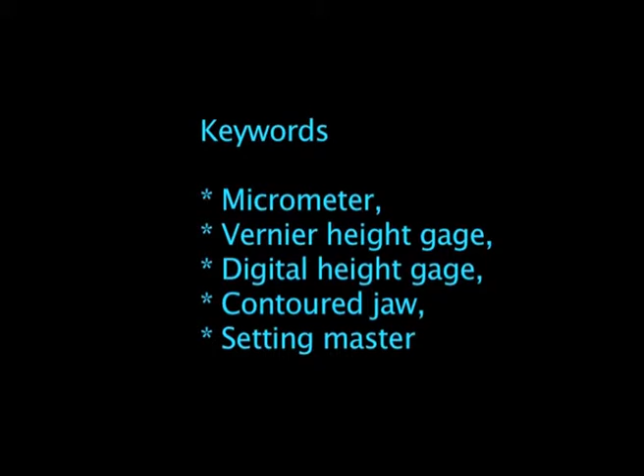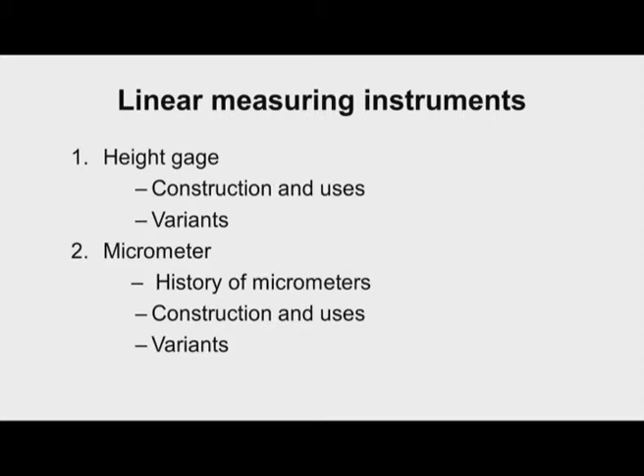In this session we will study about height gauge and micrometer: the construction of height gauge and various applications of height gauge, and the different types of height gauge. Similarly, for the micrometer we will study a little bit about its history, then move to its construction and various uses, and then study the variants of micrometer.

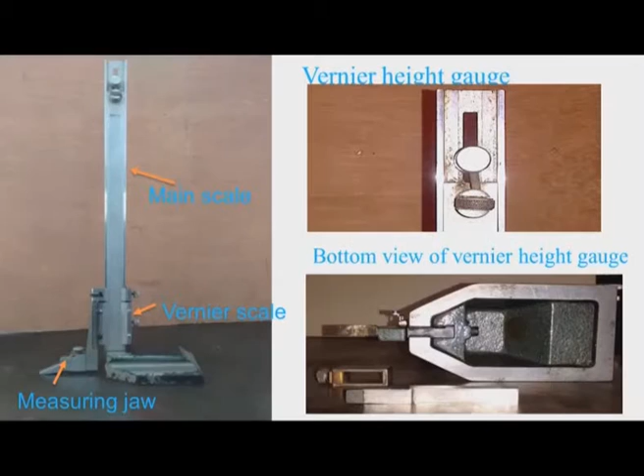Now, let us start our discussion with height gauge. This photograph shows a vernier type height gauge. I will explain the different parts of the vernier height gauge.

This is the main scale, this is the column of the vernier height gauge, and on the column we have the main scale. One side we have the metric scale, and on the other side we have the English scale.

Now, you can see here we have some arrangement for lifting the scale, for sliding it up and down. The details of this portion are shown in this figure. We can see the screw and the nut. By rotating the nut, the main scale can be moved up and down. This is needed for making the zero adjustment.

Coming to the vernier part, we have metric vernier on one side and English vernier on the other. We have a screw for clamping the measuring head to the beam, and similarly a screw for moving the measuring jaw up and down.

I can see here the carbide tipped scriber is fixed to the measuring jaw, and there is a clamp for fixing the carbide tipped jaw to the measuring jaw. By rotating this screw we can clamp the scriber to the measuring jaw.

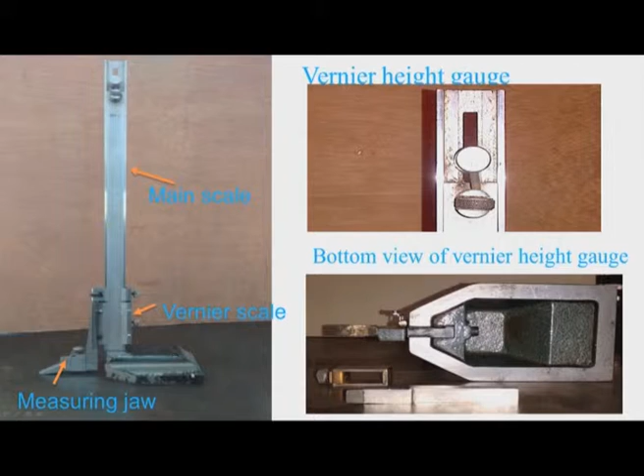This is the base of the vernier height gauge, and here is the bottom view of the vernier height gauge. This is the ground finished surface. At the center it is relieved, and this portion is the bottom of the beam, fixed to the base by means of a screw.

Here you can see the clamp which is used to fix the scriber. This is the carbide tipped scriber, and it can be fixed to the measuring jaw with the help of this clamp.

Now we can see the close view of the vernier height gauge: the vernier and a screw for fixing the measuring jaw to the beam, and then another screw. Initially we have to screw this, and then operate this screw for finer adjustment of the vernier. The scriber and clamp have been removed, and now we are viewing the top surface of the measuring jaw.

It is very essential that the top surface and bottom surface of the measuring jaw should be parallel, and these two surfaces should be parallel to the datum surface within 10 microns.

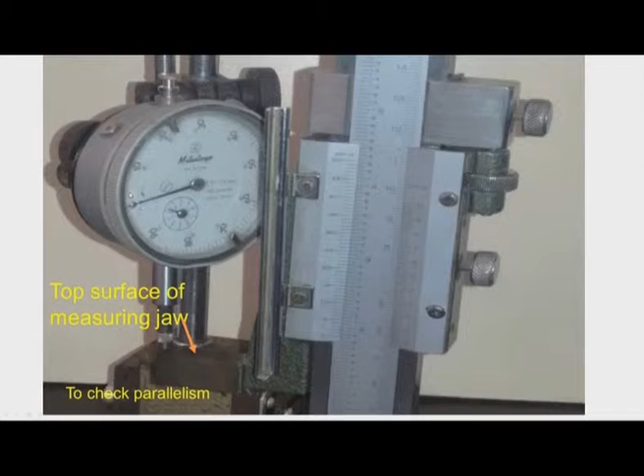Now we have to make zero adjustment when it just touches the top surface of the measuring jaw. Slowly we move the dial indicator towards the beam of the vernier height gauge, and then note down the reading. This reading should be less than 10 microns.

Now, checking for zero error in the vernier height gauge. We observe the main scale zero line here and the zero line of the vernier. They are not coinciding, even though the scriber is in contact with the datum surface, the scale is showing some reading. So this we should adjust by lifting the main scale, as I have already discussed.

Now we can see here we have lifted and made some adjustments in the height of the main scale, and now there is no zero error.

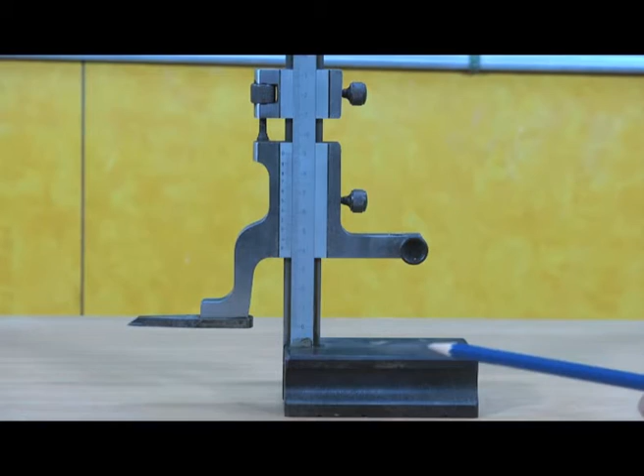Now let me explain the vernier height gauge. This shows the vernier height gauge. This is the base, and this is the main scale vertical bar. You can see the main scale; the resolution of this main scale is 1 millimeter.

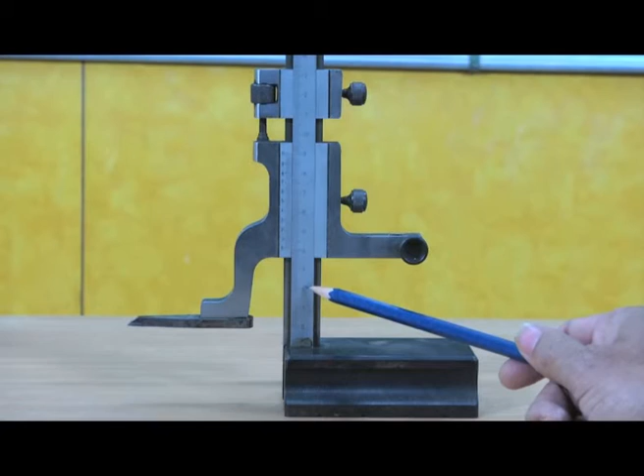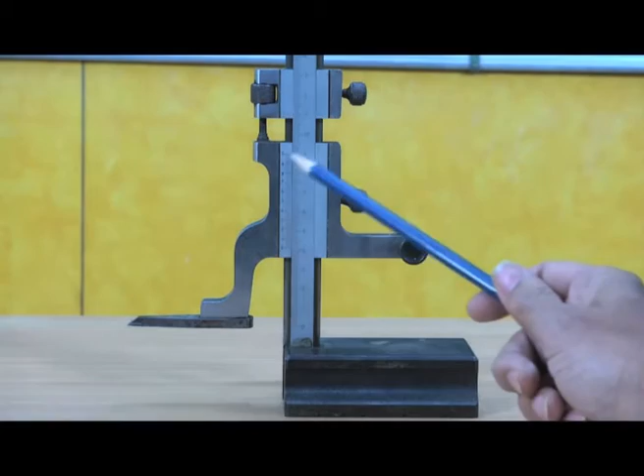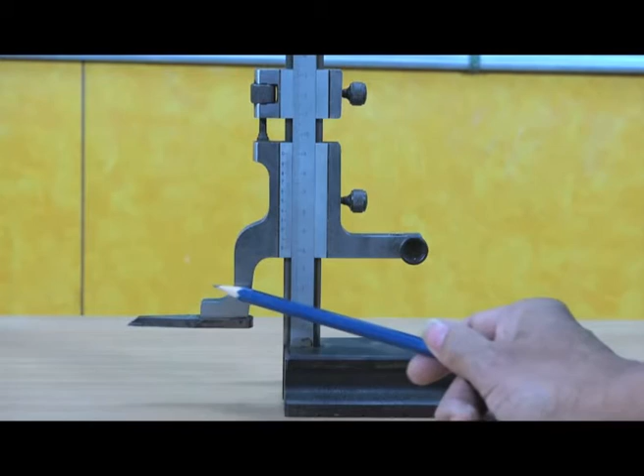Now we can see the range of this instrument is 0 to 300 millimeter, and this portion is the measuring head with the vernier scale. This is the scriber attached to the measuring head, and you can see the carbide tip here. This can be used for scribing lines on workpieces, and also for measuring the height of workpieces.

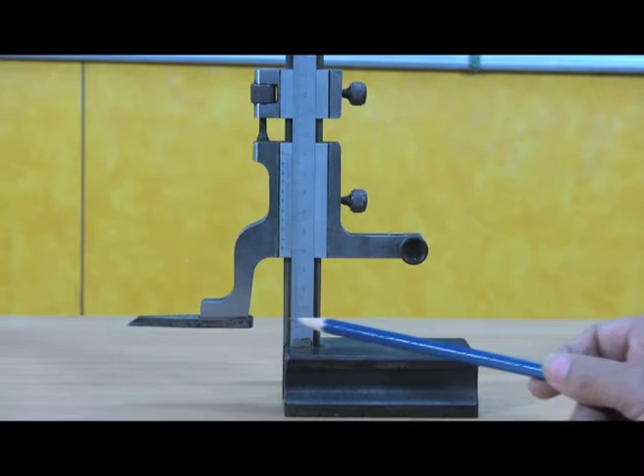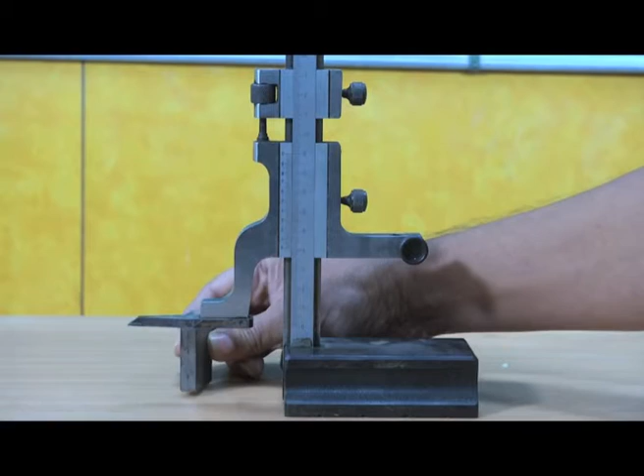Now I will explain how to use this for measurement of height of a workpiece. I am taking a workpiece here, and we should initially check approximately what is the height of the workpiece using a steel rule. Then we have to adjust the gap between the datum and the bottom surface of the scriber, lock the measuring head using this screw, and then use this finer adjustment screw.

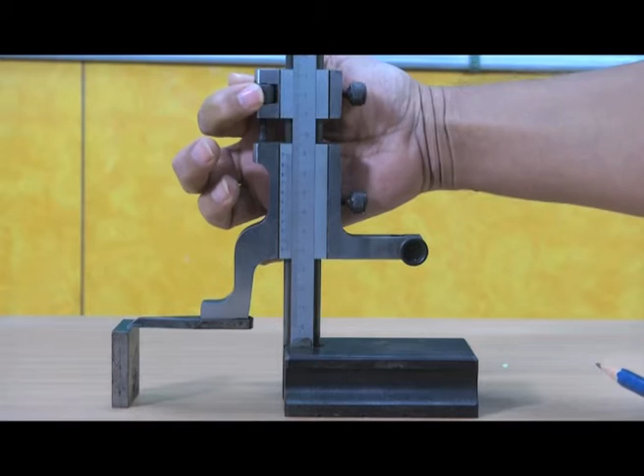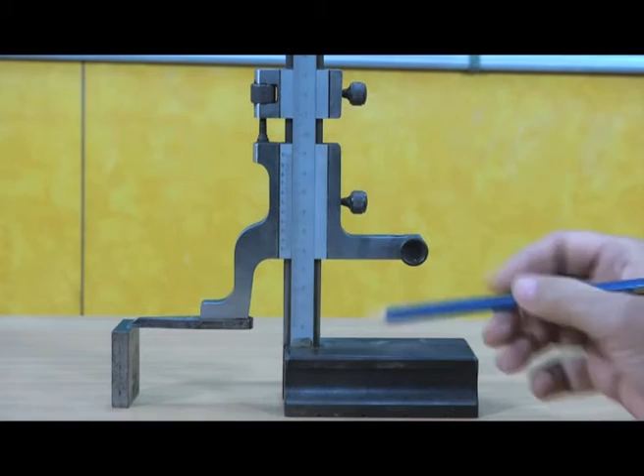This is the 0 reference. Now it is 40 millimeter on the main scale, and we have to see what is the coinciding division. The 15th division is coinciding with the line graduation on the main scale, which means 15 into 0.02 is 0.3. So to the main scale reading of 40 millimeter we have to add the vernier reading of 0.3. So the height of this workpiece is 40.3 millimeter.

Now we can see here the setting of the height gauge using a slip gauge. Initially we have used a slip gauge here, and a lever type dial indicator, and any required height can be set using this arrangement. So we can use the slip gauge, say this is 40 millimeter. Now we have to adjust, moving the measuring jaws so that this reads 0. In that case we have set the height gauge to 40 millimeter, and we can use this setting for comparison purposes to check the height of other workpieces.

In this case we are using the vernier height gauge as a comparator, and then we have the digital height gauge. You can see the base of the digital height gauge, and the beam of the digital height gauge. Now here, instead of a vernier, we have a digital readout. We have a hold option for holding the data point, and then we can fix the tolerance values.

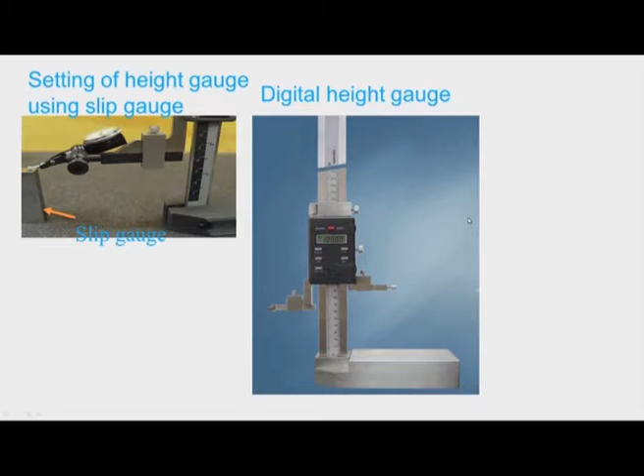So we can quickly take the readings because of the digital display. Also there is a provision for transferring the data to a computer via RS-232C for data transmission, and this will be useful for statistical quality control.

Now there are some advanced digital height gauges. A photograph of an advanced digital height gauge is shown here. This is the base of the height gauge, and this is the column or beam of the height gauge, and then we have a wheel for height adjustment. When we rotate this, depending upon the direction in which we rotate, the probes will move up and down.

Now you can see the measuring probes here. We have an arrangement for fixing multiple probes. One more probe we can fix here, so both probes we can use together. Now this is the display unit for displaying the data. Now what are the various features of such an advanced digital height gauge?

We can see here perpendicularity measurement. This instrument can be used for measuring the perpendicularity. I will just write some simple sketches. Say we have some workpiece like this. So we can fix a probe here, and we have to move the probe towards the workpiece and just touch the workpiece. Then we have to move the probe up, and again just touch the workpiece.

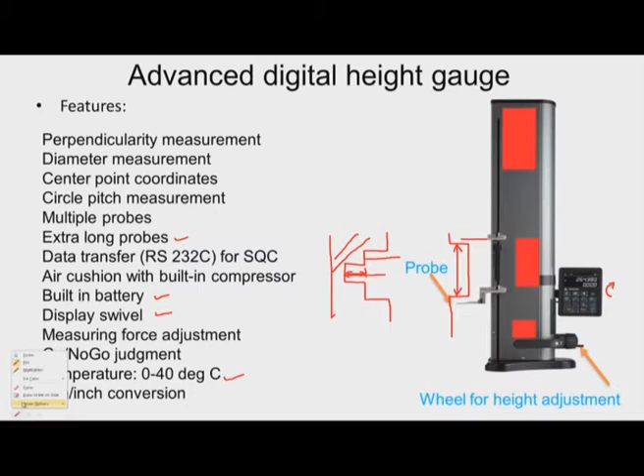Now, there are some more features. Perpendicularity of this height gauge is 0.006 millimeter. That means these instruments are available with ranges like 300 millimeter, 600 millimeter and 900 millimeter, and over the full range, the perpendicularity, that is this surface being perpendicular to the vertical movement, and that error will be within 6 micrometer.

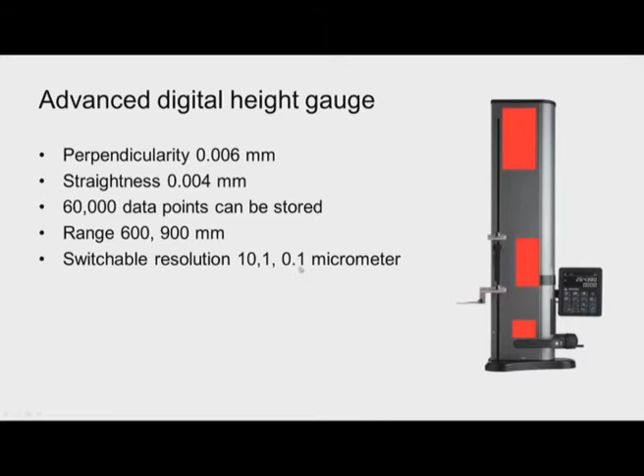The vertical movement, that is straightness of such an instrument, will be like 4 micrometer, and 60,000 data points can be stored in the memory of such instruments, and whenever required they can be retrieved and used. The resolutions, switchable resolutions are possible, like 10 microns, 1 micron and 0.1 micrometer. That means depending upon the accuracy needed, we can select the appropriate resolution.

Now, let us start the discussion on another very important instrument, that is the micrometer. Let us study some points about the history of the micrometer. Now, you can see here this picture shows a micrometer designed and developed by James Watt in 1772. You can see there are 2 dials and 2 pointers, and then we have that U-shaped body of the micrometer.

Even now we are using a U-shaped body of the micrometer with little variations, and this is the anvil fixed to the body, and this is the movable spindle. So, we have to keep the workpiece here and move this, and then by reading these 2 dials we can get the dimension of the workpiece.

And then this micrometer was developed by Jean Palmer in 1848. That means approximately after 70 or 75 years, Jean Palmer improved the micrometer. Here you can see this is too huge, we have to fix this micrometer to maybe a table surface by using bolts, whereas here this can be handheld, a very small instrument.

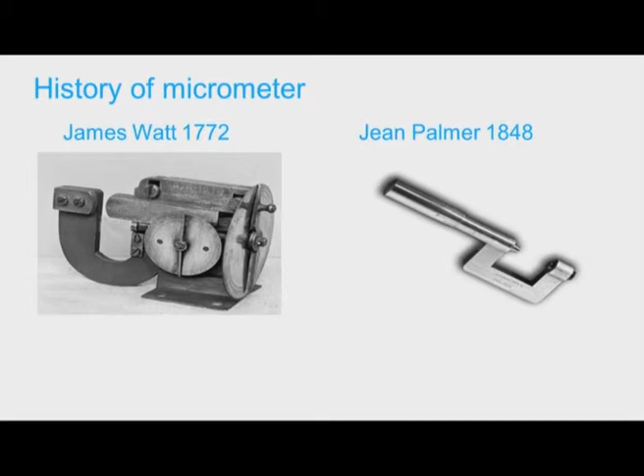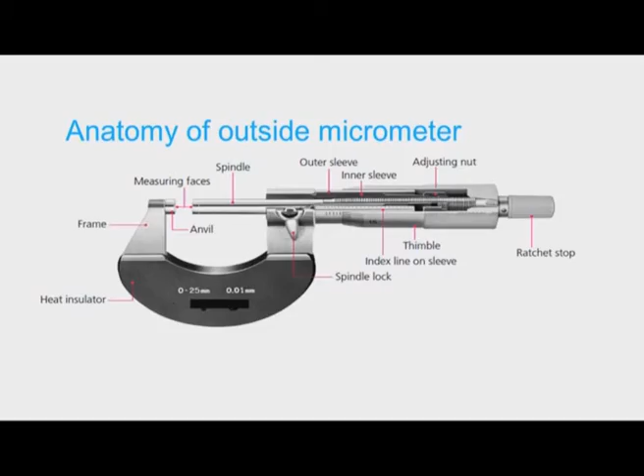Let me explain how to use the micrometer. This is the frame of the micrometer. You can see that ribbed shape, ribbings are there, so that it becomes rigid. The range is mentioned 0 to 25 millimeter, and the resolution of this instrument is 0.01 millimeter.

We can see the carbide tipped anvil and carbide tipped spindle, the clamp for clamping the spindle, the thimble, sleeve and ratchet. Before using this micrometer, we have to clean the faces, anvil face and spindle face, with a clean cloth or smooth paper, so that dust particles and oily layer is removed. Then we have to unclamp the spindle, slowly rotate the thimble like this, and operate the ratchet till we get 1 or 2 clicks.

Now we have to observe the reading. We can see the reference line, and this is 0 on the thimble. It is not coinciding with the 0 on the sleeve. That means there is some zero error. We have to eliminate this zero error before using this instrument.

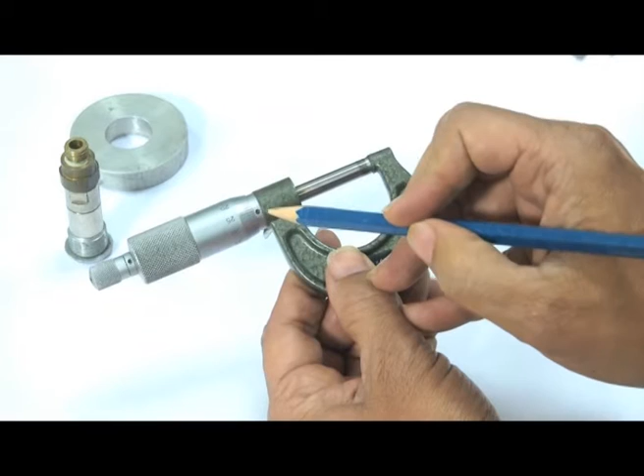For that, an arrangement is provided. When we rotate this micrometer, this is the back side view. We can see on the back side of the sleeve there is a small hole. A spanner is provided with the micrometer. We have to use this spanner and rotate the sleeve in the proper direction, so that the zero error is eliminated.

Now we can see the zero error is eliminated, and now this instrument is ready for using.

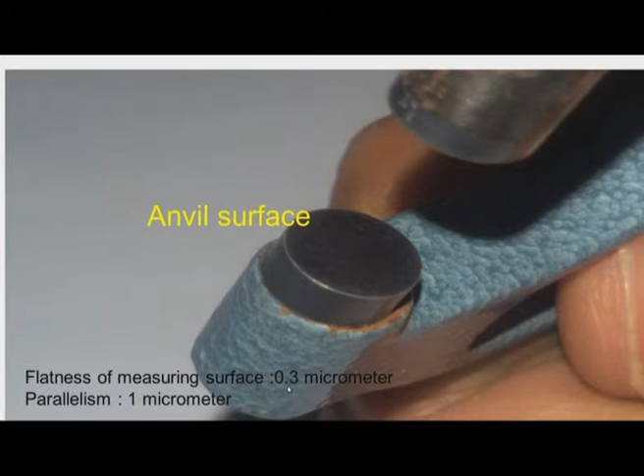Flatness of the measuring surface as well as the anvil surface is very important. They are ground and lapped, and flatness error will be less than 0.3 micrometer. The spindle surface and the anvil surface should be parallel. If there is any taper inclination, error will creep in. So it is essential that these two surfaces, anvil surface and spindle surface, should be parallel, and parallelism of less than 1 micron is maintained.

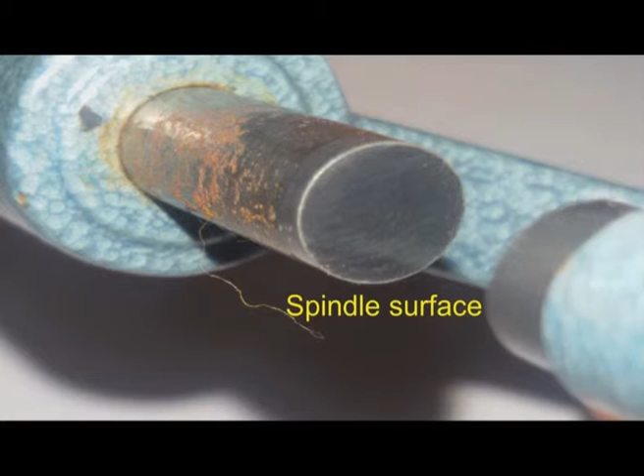It is very essential that we maintain all these precision instruments whenever they are not in use for a longer time. We should apply petroleum jelly to all the important moving parts of the instrument. Now you can see here, since the coating was not provided, there is corrosion.

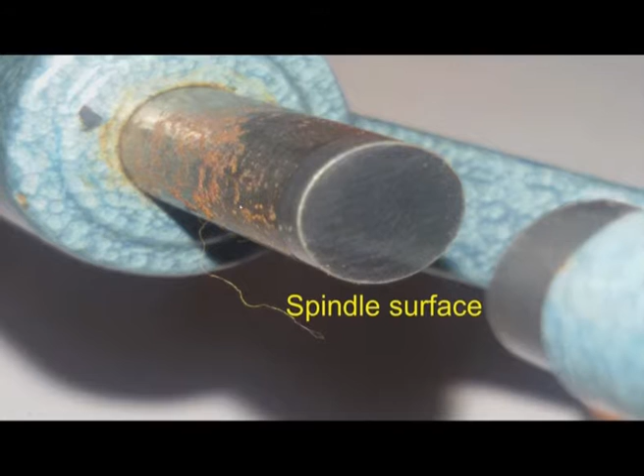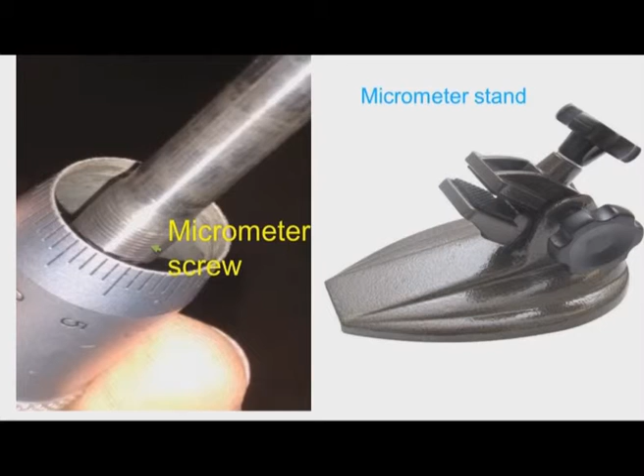Now some inner details of the micrometer we can observe here. This is the adjusting nut, and then we have the main nut. So the main nut has both internal and external threads. Inside there are threads, and this will be mating with the main screw of the micrometer, and outside of the main nut also we have threads.

So when we rotate this adjusting nut, you can see the slots are provided, and using the spanner we can rotate the adjusting nut. In the main nut we have slots cut. So when we rotate the adjusting nut, the main nut gets compressed and embraces the main screw, and hence if there is any clearance, that is eliminated and backlash is eliminated.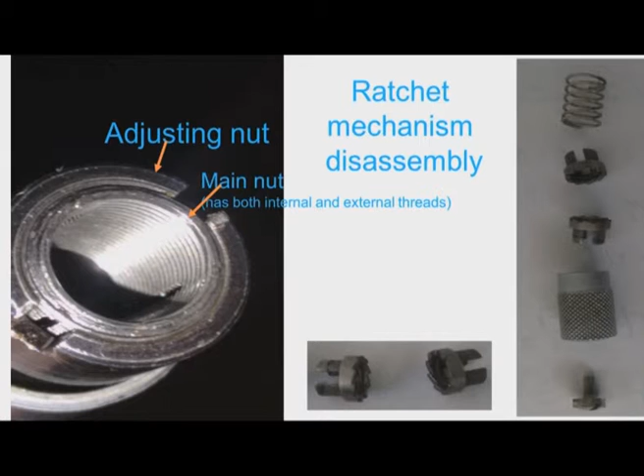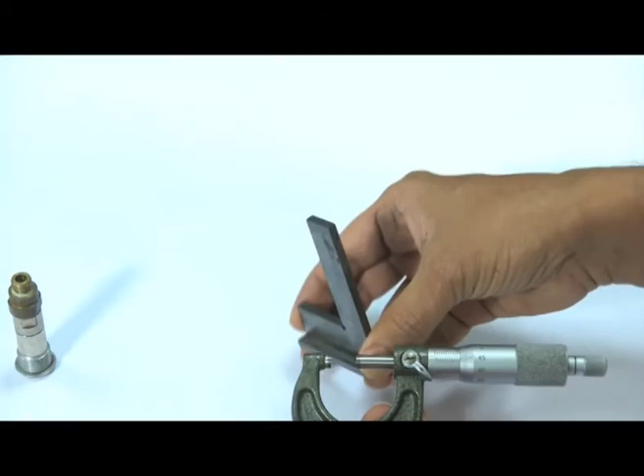Now let us study how we can use the micrometer to measure the thickness of this plate. I am keeping the plate on the datum surface, then moving the micrometer towards the workpiece, and slowly operating the thimble. The spindle is advancing and moving towards the workpiece. Now it has just touched the workpiece.

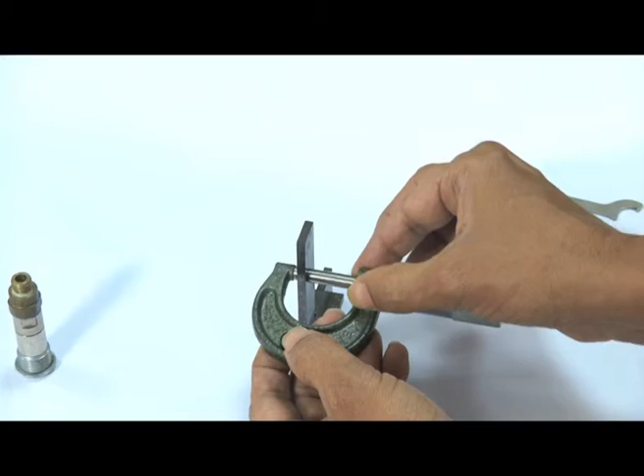I am using the ratchet to apply uniform pressure, and then I am clamping the spindle. Now slowly we have to remove the workpiece.

Now we have to take the reading. The main scale or sleeve scale reading is 0, 1, 2, 3, 4 millimeter, and on the thimble we have the second graduation coinciding. That means 2 into 0.01, that is 0.02. So the thickness of this plate is 4.02 millimeter.

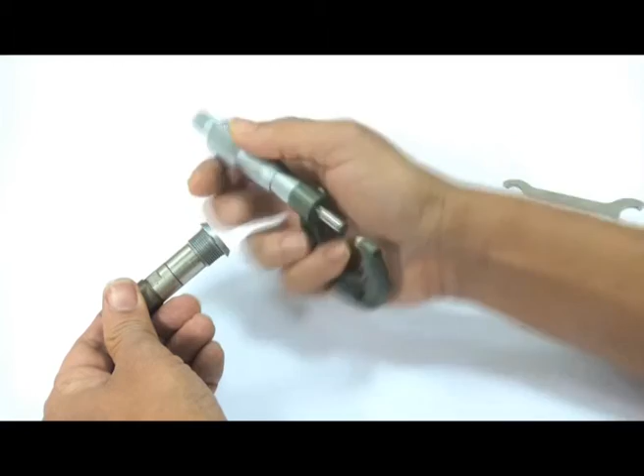Now let me show how we can measure the outside diameter of the workpiece. I am showing the measurement of OD of this portion. So now the workpiece is between anvil and spindle.

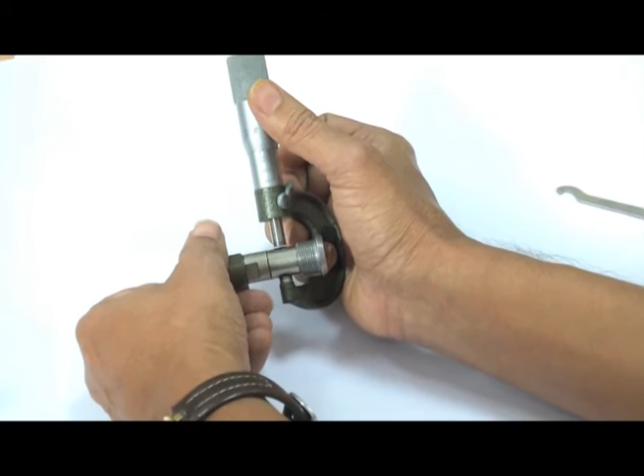Now slowly we have to rotate the thimble in the reverse direction. So the spindle is moving towards the workpiece. Now it has just touched the workpiece.

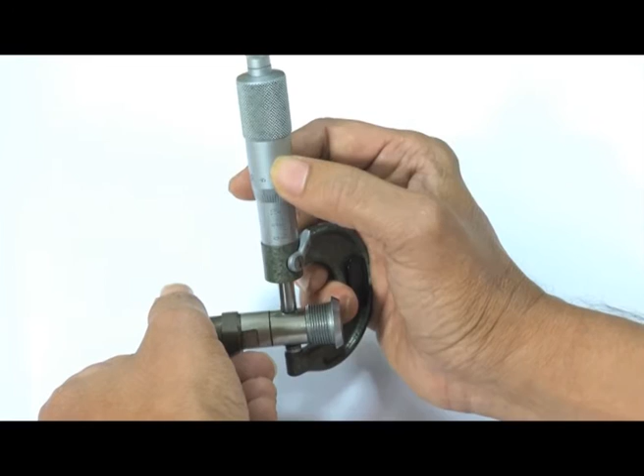Now let me operate the ratchet, and then we have to clamp the spindle. Now slowly we have to remove the workpiece.

Now we have to read the scale. This is the main scale: 0, 5 millimeter, 10 millimeter, 11, 12, 13, and then 13.5. The thimble reading is 45, 46. This reference line is between 46 and 47, so we will take 46. 46 into resolution, that is 0.01, so the thimble reading is 0.46. This we have to add to the main scale reading, that is 13.5. 13.5 plus 0.46, that means 13.96.

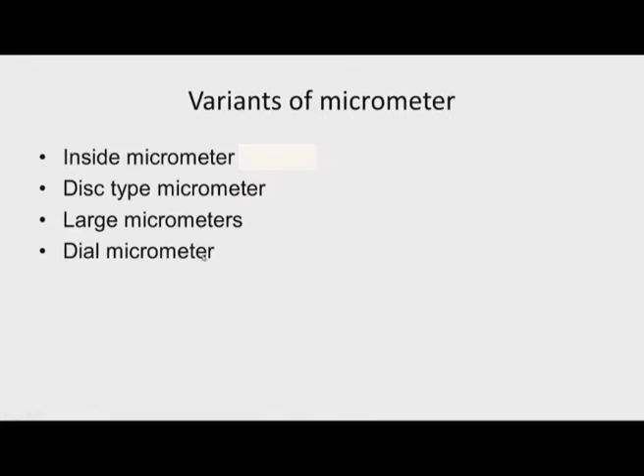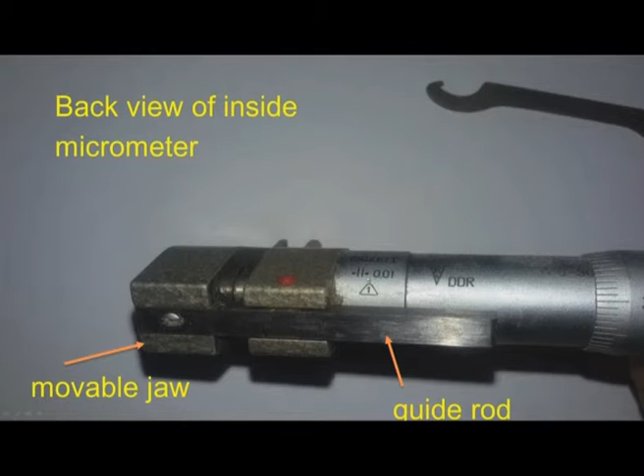Now what we can see in this photograph, there is a guide rod, and this is the guide. So when we move the thimble, this movable jaw will move, guided by this guide rod and the guides. The resolution of this instrument is 0.01 millimeter.

Now we can observe that the jaws of this instrument are contoured or radiused. This is necessary when we want to measure the inside hole diameter. If we have flat surfaces, then the measurement will not be correct.

We can see the example here. I will draw some sketches. So this is the inside, this is the hole. If we have a flat jaw, then the contact will be like this, and this much error will occur in the measurement. Because of this radius jaw, the contact will be like this, and there will not be any error. So this is the reason why the radius is provided on the jaws.

Now another variant is the disc type micrometer. This is used for measurement of spur gears and helical gears. The details of this we will see in the appropriate module when we discuss gear measurement.

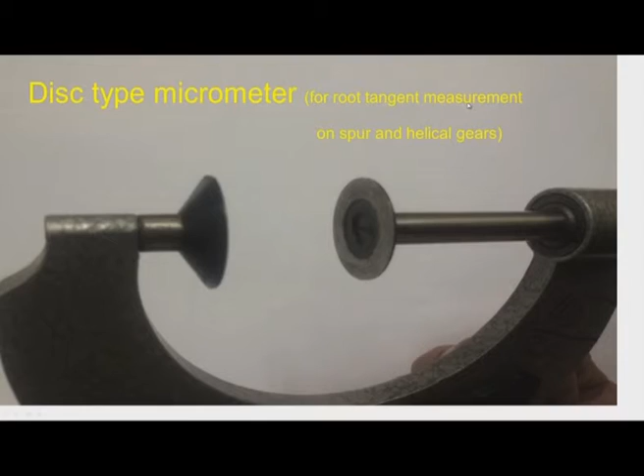Let us learn something about a large micrometer. Now in the market, very large micrometers are available with the range 25 to 2000 millimeter.

One thing we can observe is the measuring head range remains the same, 0 to 25 millimeter, and then we use setting masters to set the distance. For example, in this case we have a setting master of say 25 millimeter length. We have to place the setting master between anvil and jaw, and then rotate the thimble so that the spindle just touches this surface, and the setting will be 25 millimeter since we are using a 25 millimeter setting master.

If the workpiece is greater than 25 millimeter, then we can use this instrument. That means the range of this instrument becomes 25 to 50 millimeter with this 25 millimeter setting master.

We have to place the workpiece here, rotate the thimble, and take the reading. To this reading we add the size of the setting master, and then we get the workpiece size. You can observe an insulating gripper is provided here.

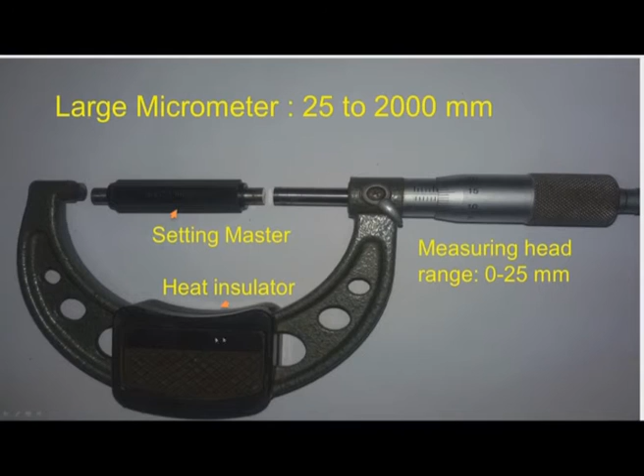We have to hold the micrometer at this grip insulator, heat insulator, so that body temperature will not transfer to the instrument. When we hold the micrometer for a longer time, like 20 or 30 minutes, if the heat insulator is not provided, the body heat will get transferred, the body expands, and measurement error will occur.

Various sizes of setting masters are available in the range of 25 to 2000 millimeter in steps of 25 millimeter. Depending upon the workpiece size, we have to select the appropriate setting master, set the micrometer, and then use it.

These setting masters have a surface flatness of 0.3 micrometer or less. They are ground and lapped so that very good flatness is achieved.

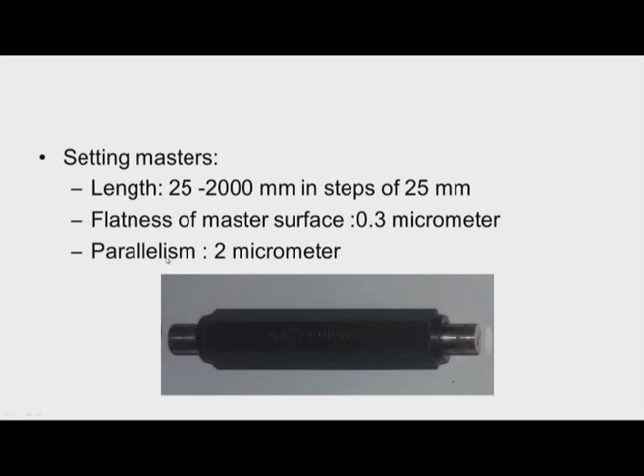Also, the parallelism between this working surface and that working surface is very important, and it is maintained at 2 micrometer or less, so that we get a good accurate measurement.

What is the advantage of using this dial? The dial can be used to maintain uniform pressure. In the absence of a ratchet, the dials are provided, so that when we rotate the thimble...

Now we have the workpiece here. When we rotate the thimble, the spindle moves, and force is applied to the dial indicator, so the pointer moves. By noting the amount of rotation of the pointer, we can maintain uniform pressure on the workpiece. That is one thing.

The other use is that the dial can be used for go and no-go judgment. That means sometimes the actual size of the workpiece is not required; what is required is whether the workpiece is acceptable or not, whether it is within range.

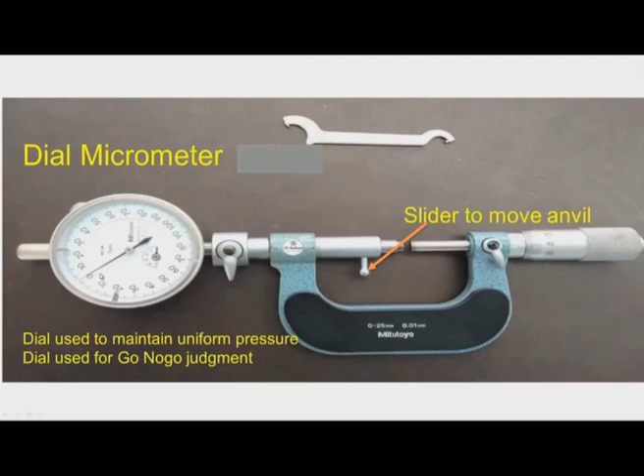In such cases, we can insert the workpiece here, move the anvil inside by operating the slider, keep the workpiece in place, and then release the slider so the anvil moves towards the workpiece. We note down the reading. If the reading is within the limits, the workpiece is accepted; if it is beyond, the workpiece is rejected.

Let me conclude this session.

In this session, we discussed the height gauge, different types of height gauges, their construction, and the various uses of height gauges. We also discussed the micrometer: its history, construction, and various types. In the next session, we will continue the discussion on other types of micrometers. Thank you.